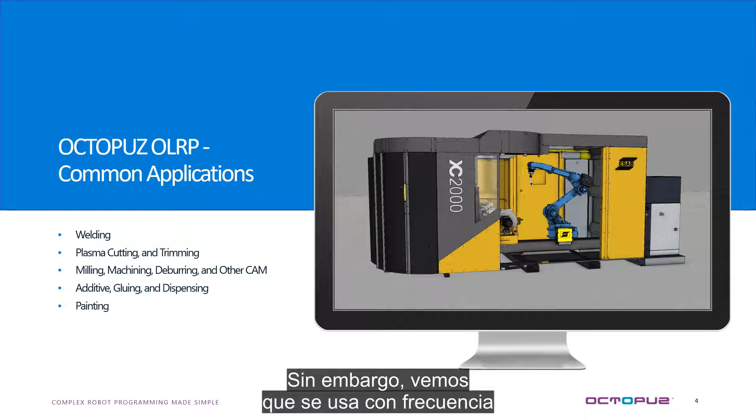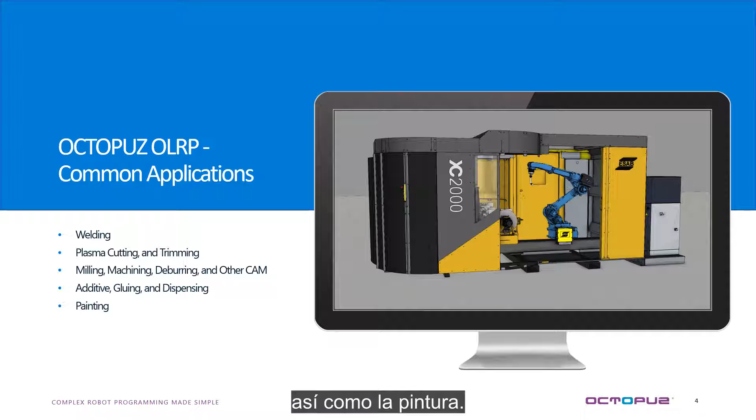The most common robot application that we see the software being used for would be welding. However, we do see it very commonly used to also program plasma cutting and trimming, machining, milling, deburring, and other CAM operations, 3D printing, additive gluing and dispensing, as well as painting. Now let's take a look at the software and see how it works.

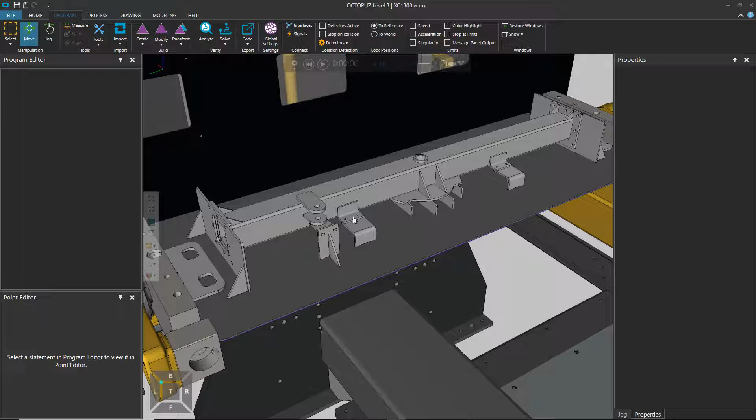Here we can see an ESAB XC1300 pre-engineered welding cell built up within the OCTOPUZ software and ready to program. The part has also already been loaded. I'm going to hide my fences, and then let's zoom in to take a closer look at the part we'll be welding. We'll start by generating some welds on this feature right here.

I'll select the two different faces that I'd like to weld together. Let's say this face and this face. And the software will automatically find the intersection between the two faces and generate the preview of the weld path that will be needed to accomplish this particular weld.

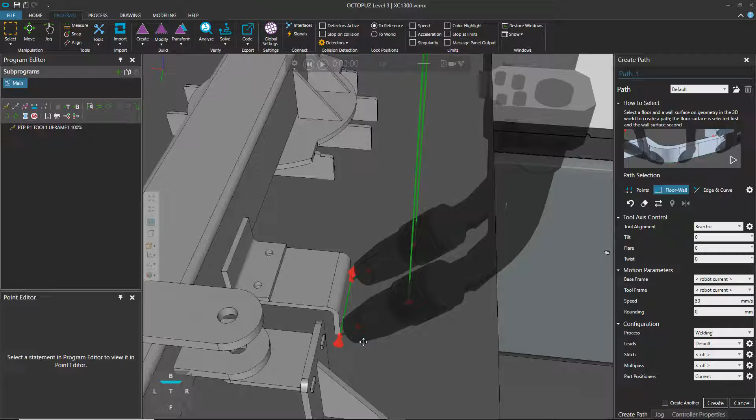We can make more precise adjustments to the location of the weld by applying offsets. As I add offsets to the beginning of the path, the end of the path, and the stick out of the tool, we can see that the preview of the path is being updated to reflect what our new path will look like.

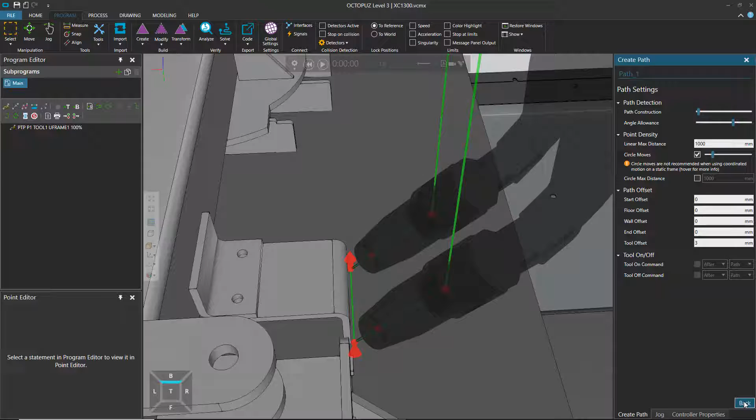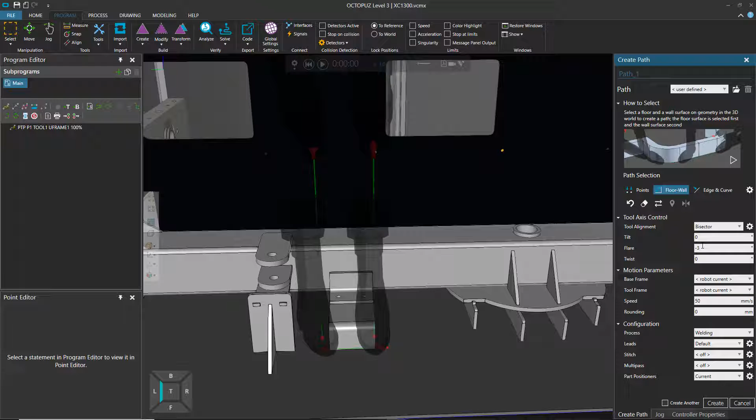Once the path location is determined, we can go ahead and change the torch orientation throughout the path. I'm able to tilt towards either of the faces that I'd like to weld. I can adjust the flare in order to create a push or a pull on the weld that we're creating. And I can rotate the torch throughout the path about the wire axis.

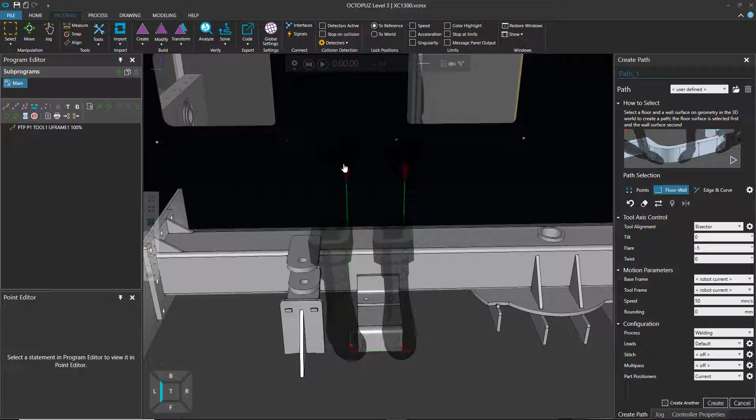Next, I'll adjust the air moves leading into and out of the path. By default, they're coming directly down into the path and pulling directly up out of it. Let's say I want to make these much shorter. I'll scroll down to where it says leads and select this gear icon to view the more advanced options for the leads points.

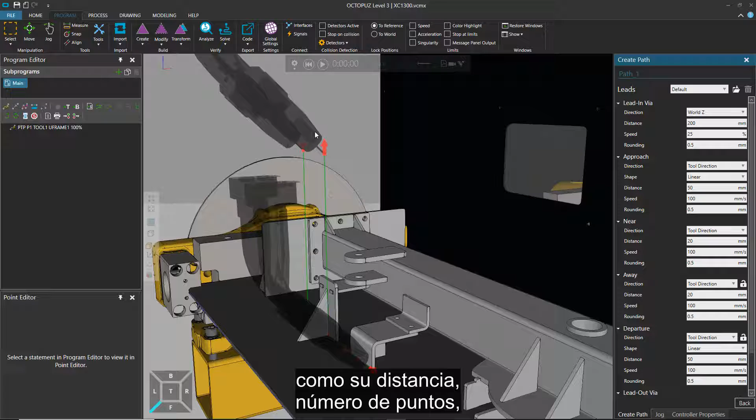Here we can see the menu where we can make changes to everything about these points, such as their distance, the number of points, their direction, whatever it might be. I'll adjust the distance down for the first point from 200 millimeters to 50 millimeters, and I'll do the same for the last point as well. Now the preview shows the path with much shorter leads points on either side of the path.

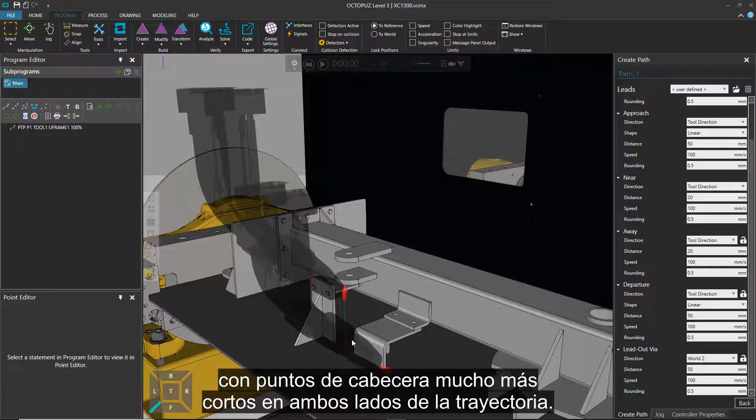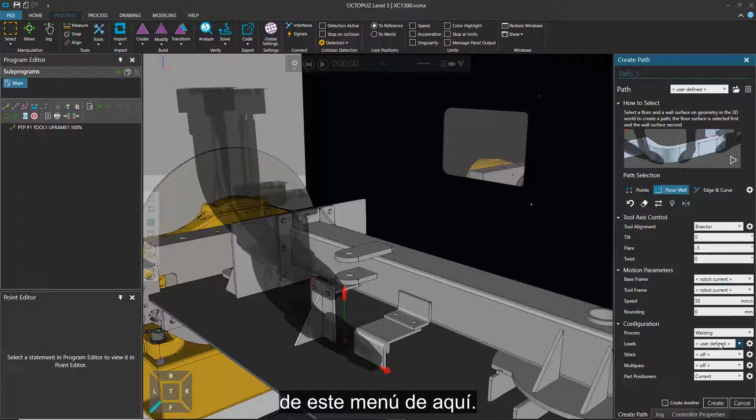These are quite a few settings that I'm not going to want to make changes to every single time that I create a path, so what I can do is save a template of these settings to be used later on. For example, if I return back to the main path creation menu, when I'm creating a path in the future, I can select a template that I've saved out of this menu right here. I happen to have a template already saved in here for shorter leads, which use the same settings. In the future, when I'm creating welds, I can just simply select this template and it'll apply these settings for me automatically.

Applying stitch or intermittent welding is done much the same way. I'll zoom in for a closer look.

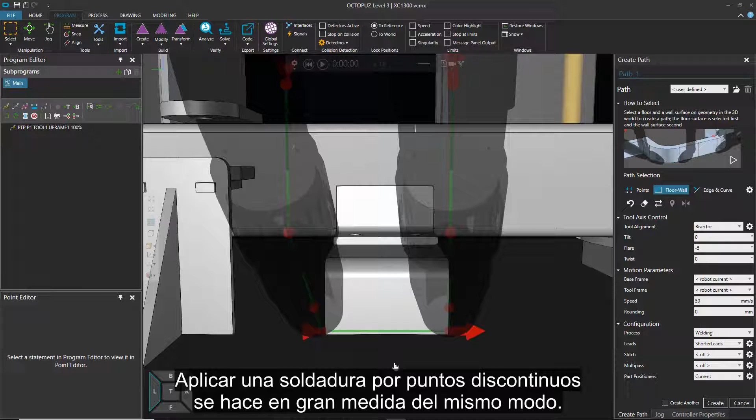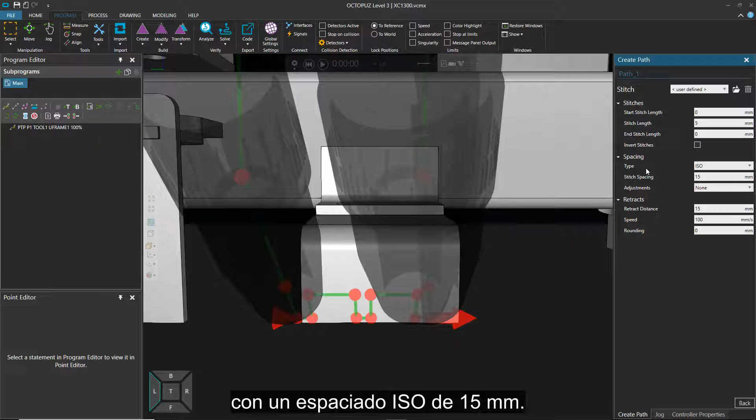We'll click on this gear icon to see the more advanced stitch welding options. I'll start by turning the stitch welding on, and then all I need to do is specify the stitch length and the stitch spacing. Let's say, for example, we're doing 5mm stitches with an ISO spacing of 15mm. The software will calculate for us where the stitch welds are going.

We do also support AWS spacing. And we also make use of even spacing, where we simply define the number of stitches we'd like to see evenly spaced throughout the path, and the software will calculate the spacing for us.

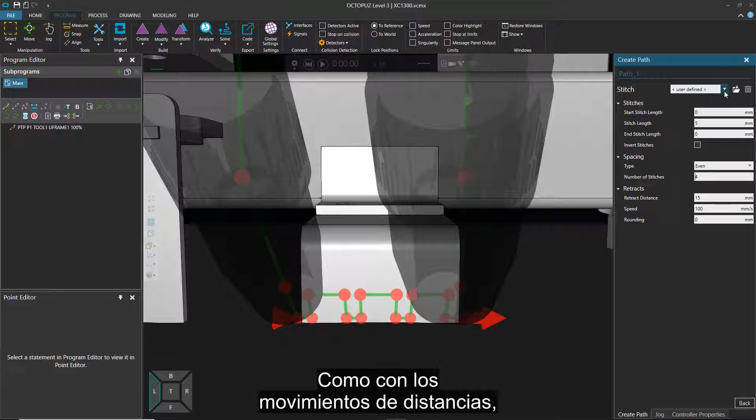Just like with the leads motions, we can save a template of these options. I'll leave my stitch welding off for now.

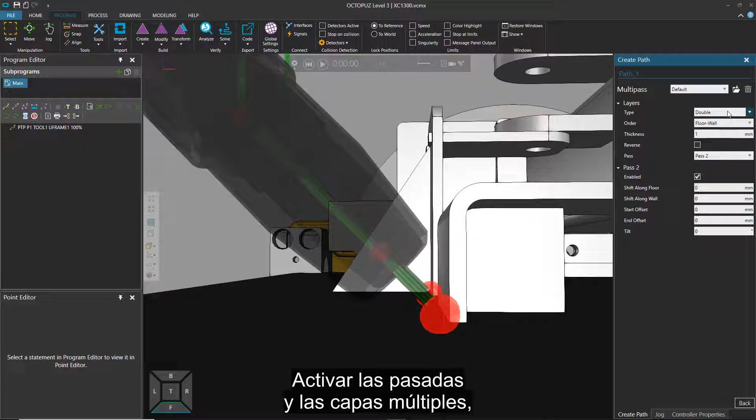Multipass and multi-layering is done much the same way. We can go into the advanced menu, turn multipass or multi-layering on, choose the number of layers we'd like, the base thickness between each layer, and then we can see all the different layers that will be produced.

We are able to change everything about each one of these individual passes as we could about a regular path, such as offsets or tilts or anything like that.

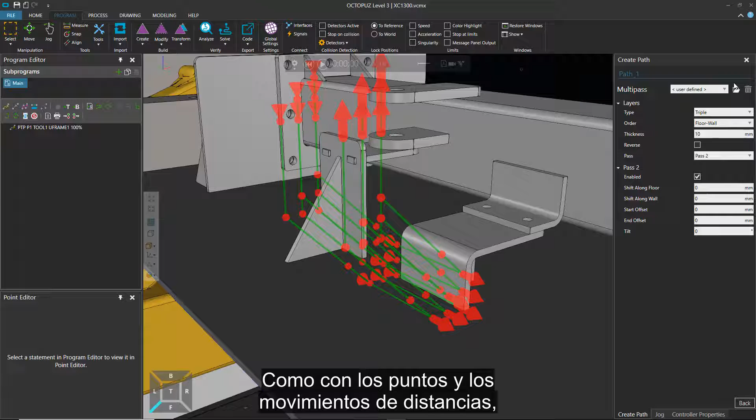Just like with the stitching and the leads motions, we can also save a template of these settings. I'll leave multipass off for now.

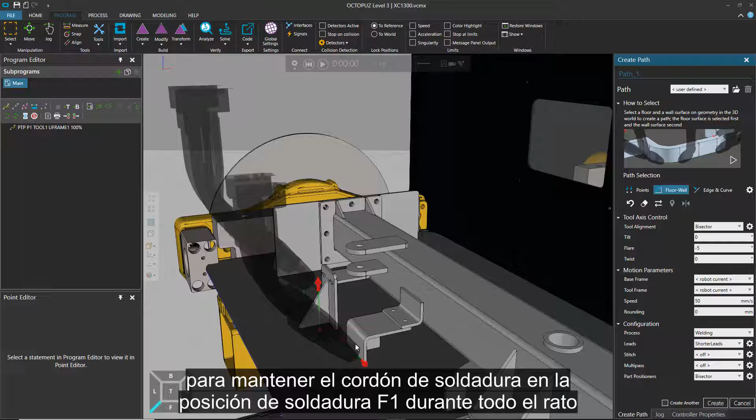The final step is to determine the behavior of the rotary axis throughout the entire path. I'm going to configure my rotary axis to cradle the weld bead in the 1F welding position the entire time, to have the torch pointing downwards throughout the path.

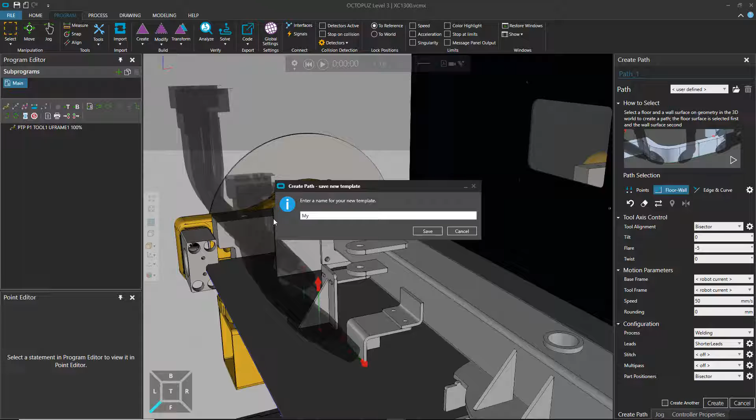I can save a template of all the parameters I've set while creating this path to automatically apply them to future welds that I create. I'll call this my path template. And then I'll hit create.

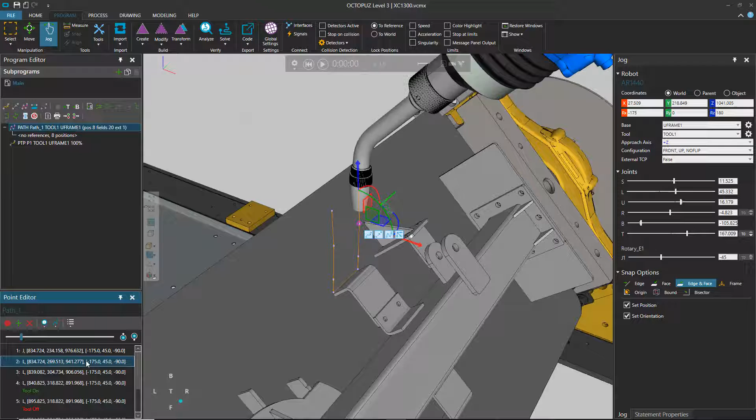Here we can see the points of the path that we've created. Let's jog our robot to them. The path looks good. I'll go ahead and create another one.

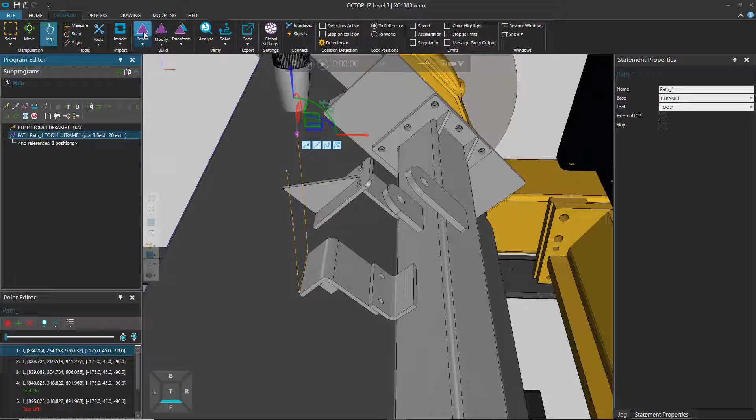I'll use the exact same settings as was used with the My Path template and create another path here. There's my second path, and I'll right away create my third path. And now we've generated these 3 weld paths.

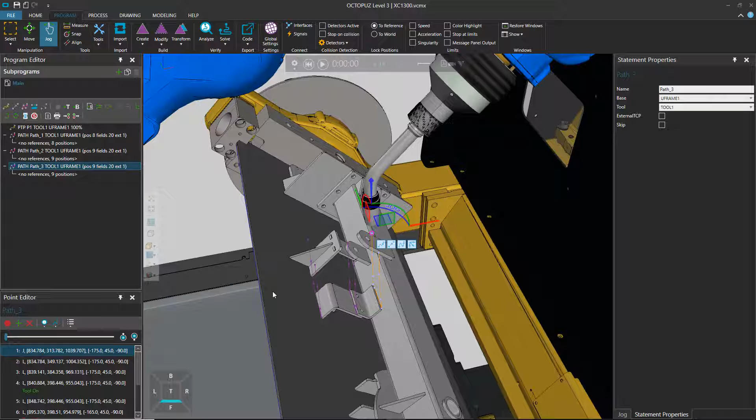Now if we want to create the same welds on the other side of the part, on the feature mirrored to the other side, we could create them one by one. As we've seen, it would be quite quick to do that.

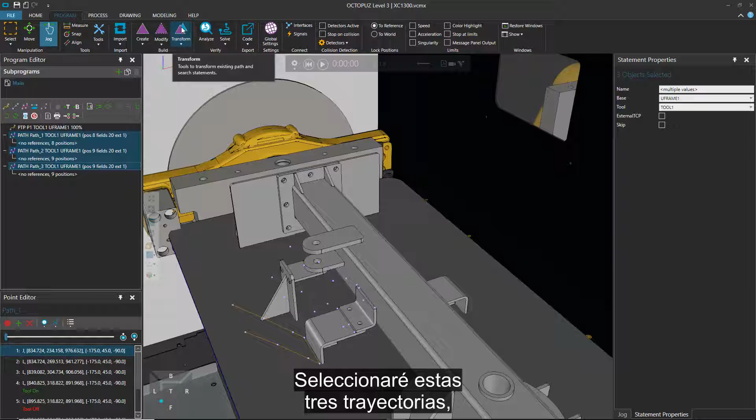But if we wanted to be really efficient, we could select the 3 paths we've already created and simply mirror them to the other side. So that's exactly what I'll do. I'll select these 3 paths, I'll click on Transform up in the top ribbon, and I'll mirror the paths from this side of the part to this side of the part.

Here we see a preview of the new paths that will be created. I'll click on Transform, and there are my new paths.

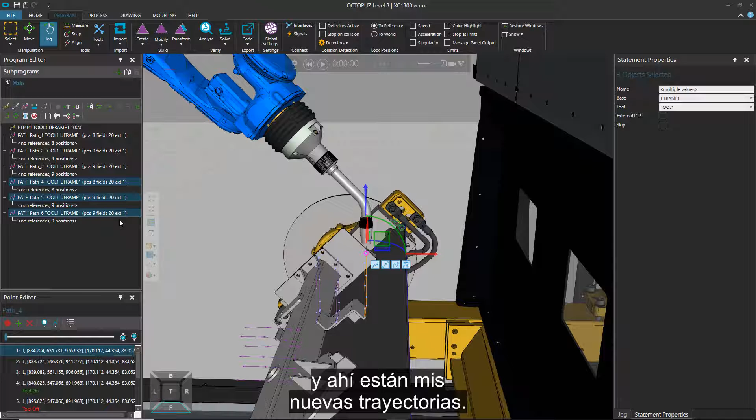Now I'll create a path along this weld right here. Again, I'll go into the Path Creation menu, select the 2 faces I'd like to weld together, and you'll notice that this torch preview is slightly different.

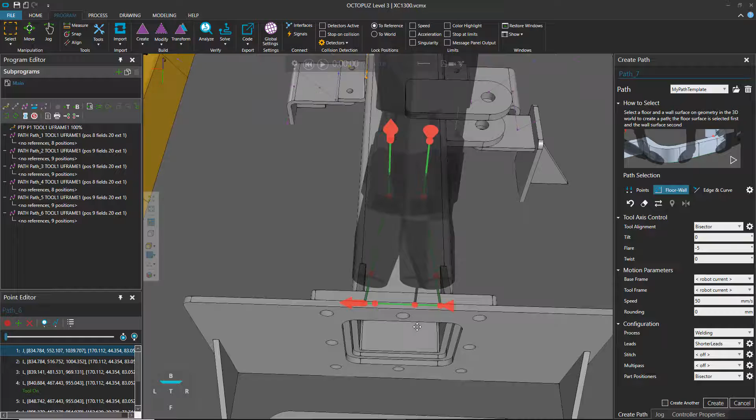A flare angle has already been applied to the beginning and the end of the weld. The Path Creation has done this automatically to ensure that the nozzle of the torch does not hit the part throughout this path.

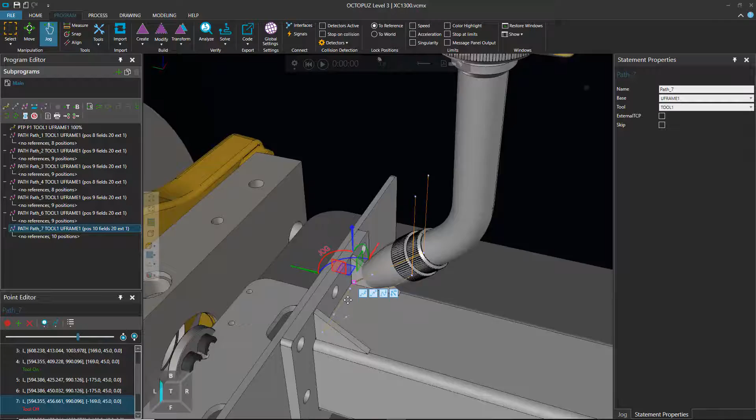Now I'll select all the welds that I've created on this side of the part, and I'll mirror them again. This time mirroring them from this side of the part over to this side of the part.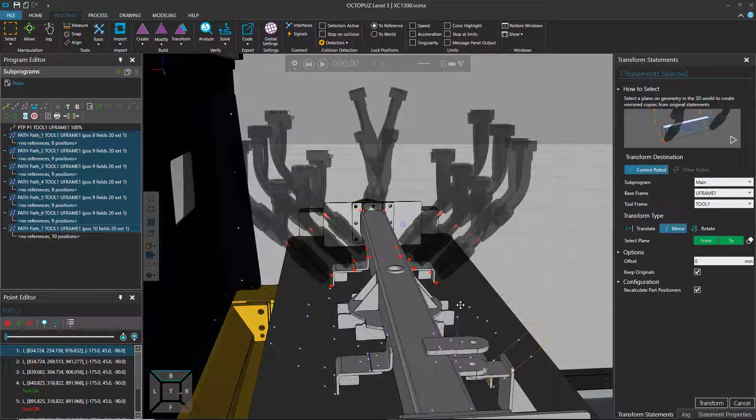The previews seem to be correct, so I'll hit Transform, and there are my new paths.

Next, we're going to want to run a check on the entire program that we've created up until this point to see if there are any kind of errors on the robot.

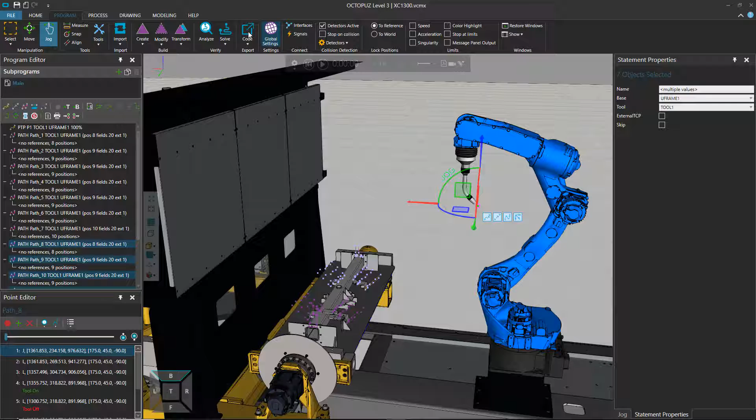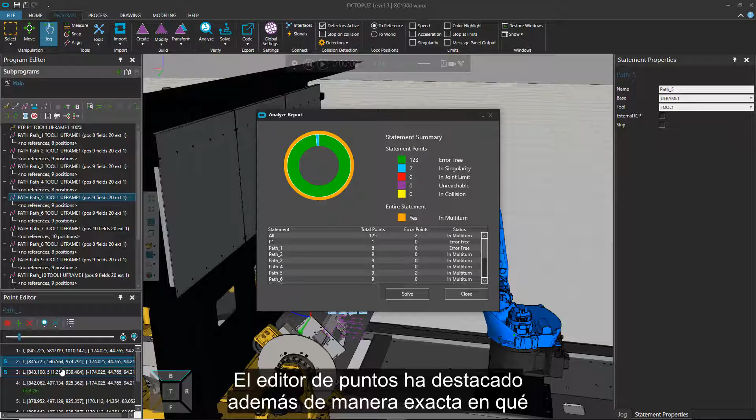I'll start by running the analyzer. The analyzer will go through our program and search to see if there are any collisions, joint limits, singularities, unreachable positions, or any multi-turn issues throughout the path. The report lets us know that we have 2 points that are in singularity throughout the path. The point editor has also highlighted exactly which path and which points the issues are located in.

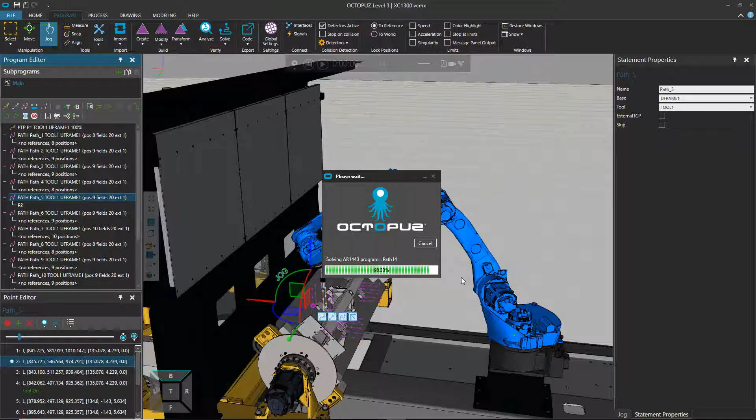I could resolve these manually, but I'm going to have the solver fix them for me automatically instead. I'll click on Solve, and I'll have it check my entire program. This has gone through, and it has fixed the singularity issues for us automatically. We can close this and watch our simulation.

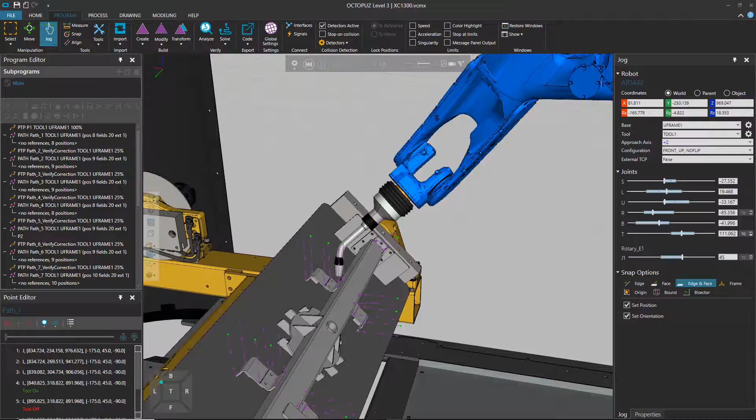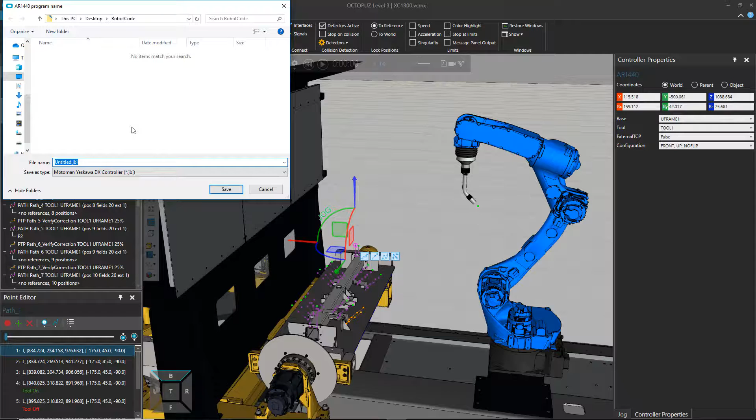Once we're satisfied with the program that we've created, the final step is to produce the robot code in order to run this on a physical robot. To do that, I'll simply select the code option up here in the top ribbon. This will open up a file explorer to let me decide where I'd like to save the file and what I'd like to name it. I'll call this demo post.

You'll notice that it's already prompting me to write this out as a job file for a Motoman robot using a DX controller. This highlights that within OCTOPUZ, it doesn't matter what brand or what model of robot you're programming, the process for programming is all the exact same. It's only now that when we go to post the code out, the software will determine for us automatically which brand and model of robot and which robot controller is being used, and it'll call up the post processor needed for that specific robot. I'll hit save.

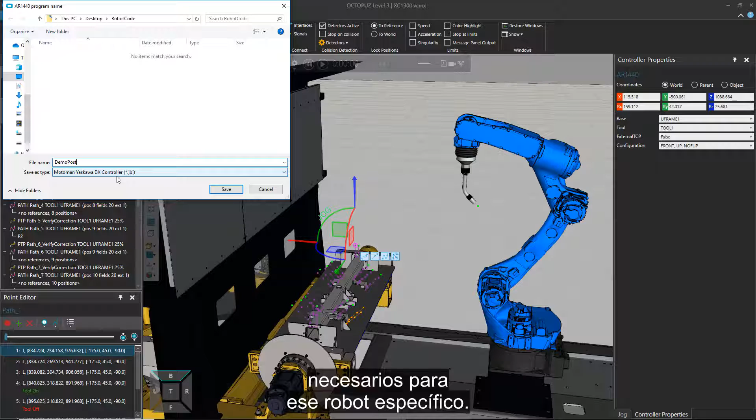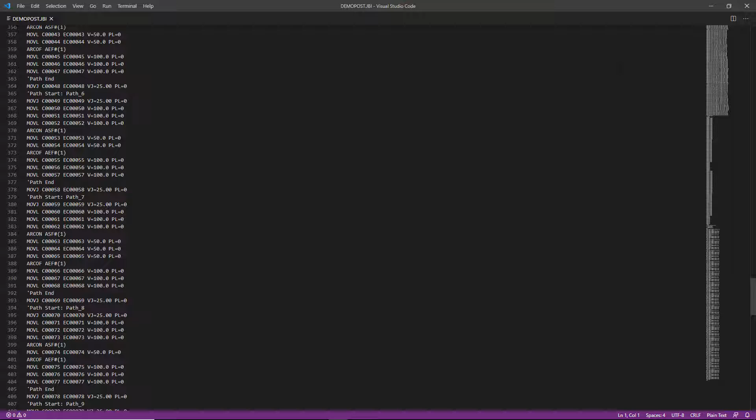So as you can see, OCTOPUZ makes programming your robots very quick and easy. In under 15 minutes, we've programmed a new welding job on our robot, which includes 14 different welds and nearly 140 points. We've also verified that this job can be run on our robot without any collisions or other errors.

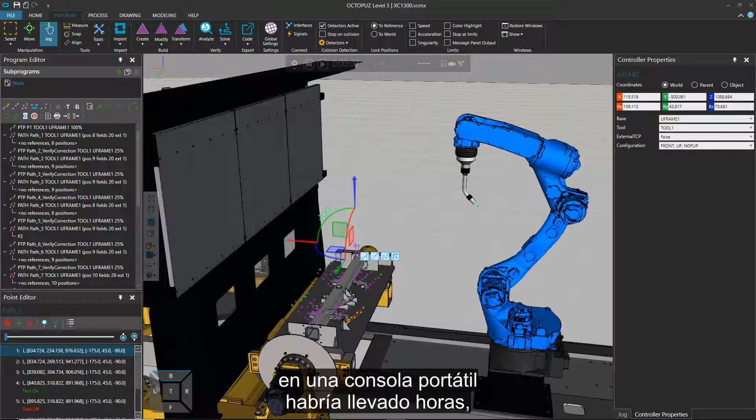Programming an operation like this on a teach pendant would have taken hours, even for the most skilled robot programmers. And so this represents quite significant time savings, not just for those of us who need to program our robots, but also for the robots themselves, as they can remain in production while these new programs are created.

Let's quickly look at a few success stories of OCTOPUZ customers who've improved their businesses by using OCTOPUZ to program their robots. First is a yellow goods manufacturer, producing agricultural, earth-moving, quarrying, and construction equipment. They have a large number of FANUC robots, about 30 of them at their facility, as well as a few ABB robots. All of them are welding.

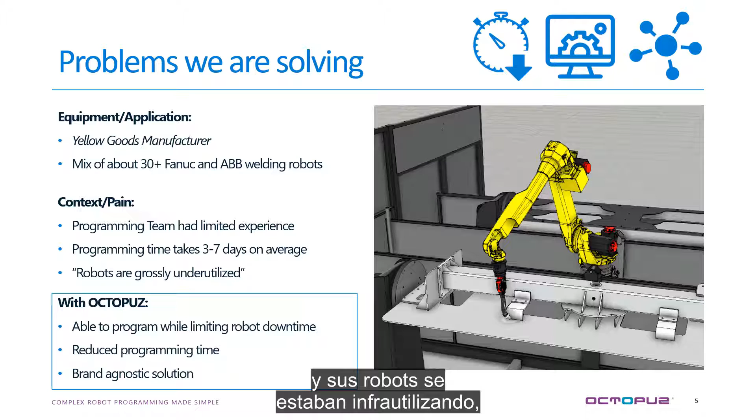Before using OCTOPUZ, they were programming everything on the teach pendant, and their robot programmers were relatively inexperienced. Their programming time was dragging on for days, and their robots were being underutilized. But by switching to program with OCTOPUZ, they were able to bring programming time down to a maximum of just a few hours with no downtime on the robot. So the robots were able to be used more, and they were also able to program both brands of robots all within the same software.

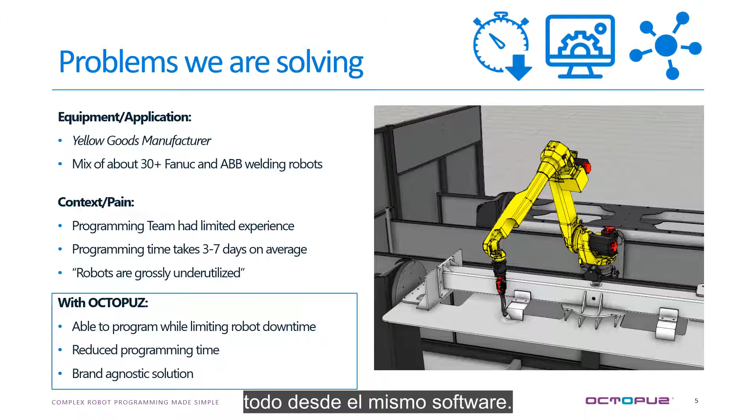The second is a customer manufacturing plastic products. They currently have 5 FANUC robot cells. The programming time on the teach pendant was so long that the robots were only running about 20% of the time. This caused a lot of frustration with management because, similar to our first example, they had purchased expensive hardware that wasn't being used very much.

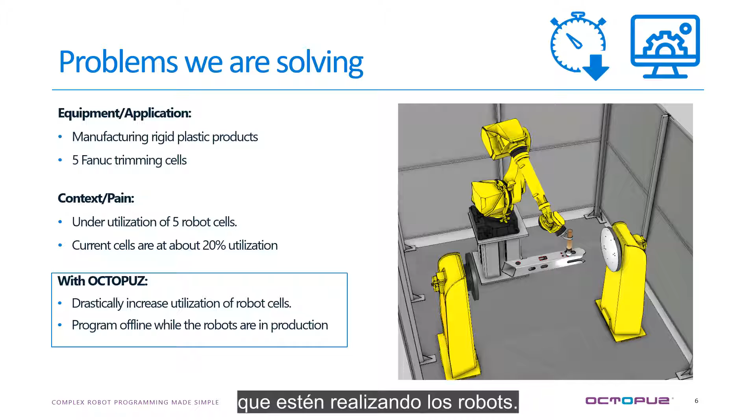So by switching to OCTOPUZ for programming, they were able to keep all 5 robot cells running pretty much constantly because they could program them much faster and could program them without taking the robots out of production. So these two examples show that the size of the organization doesn't really matter, and neither does the application that the robots are doing. OCTOPUZ is able to add value in all kinds of situations and businesses.